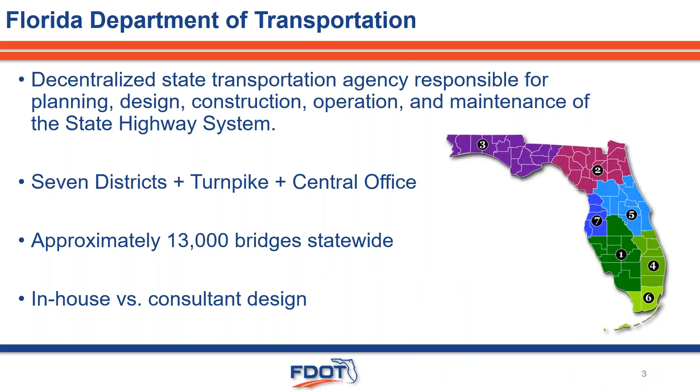We own and maintain approximately 13,000 bridges across the state, one of the largest bridge inventories in the United States. Infrastructure projects are delivered in the state of Florida through a combination of in-house staff design and consultant engineering firms, and FDOT provides specifications, standard oversight, and final approval on these projects.

Dr. Chung is based out of the Florida Department of Transportation State Materials Office, or the SMO. The SMO supports our central office by providing statewide leadership in materials engineering, testing, research management, and quality assurance. They work to develop material specifications, evaluate product performance, and establish testing acceptance criteria to support the Office of Design.

With that, I will turn it over to Dr. Oliver Chung. Thank you, everyone. Thank you, Natasha. This is Oliver. I'm a state corrosion engineer, and right now I've been in service for 2 years, so I'm still learning, and today I'm going to be learning with you.

Here's a little bit of outline. Everyone knows corrosion, and I always like to start with the 5W1H: who, where, when, why, how. All this will solve my problem, and that's the way I'm thinking. I also want to introduce a little bit of the framework of the State Material Office, especially my team, the Corrosion Research Lab, and based on the topic present in the future, how we execute the CP program in the past and moving to the future.

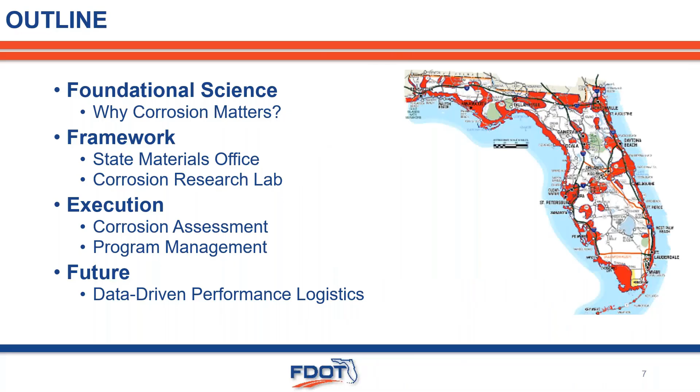Maybe the CP program is a good way to improve that. As I mentioned, future data-driven performance and logistics is what FDOT is moving forward with. So let's start with the 5W1H.

What is corrosion? I'm still learning, like everyone. In Florida, as Natasha said, we have almost 12,000 to 13,000 bridges considered in extremely corrosive environments, and bridge substructures are always commonly affected by corrosion-induced damage.

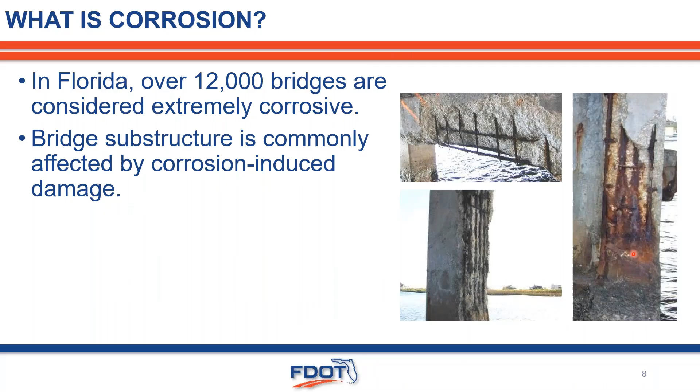We have a lot of water activity, all this in the splash and tidal zone. You can always see some corrosion issues. As you can see, we have something on the girder, something on the pier. All this reduces the service life of the bridge.

So why does corrosion matter? Here's an example - more information on the Fern Hollow Bridge is being presented in May. Everyone, I think all bridge engineers know this accident or incident. So it's about safety, service life reduction, structural integrity, and especially cost.

Right now to rehab one bridge costs a lot of money, and there's environmental impact. Based on the data, you can see our climate has been changing. Average temperature is starting to rise annually.

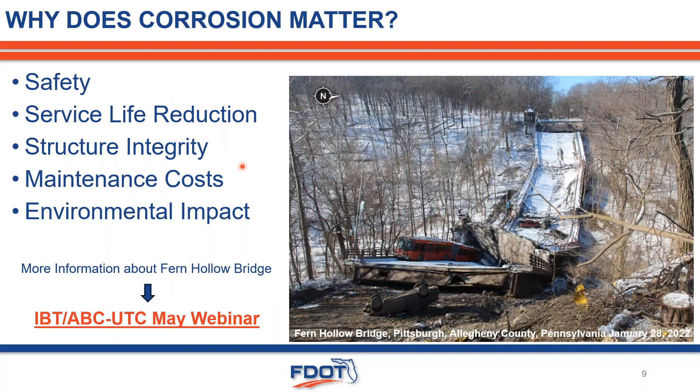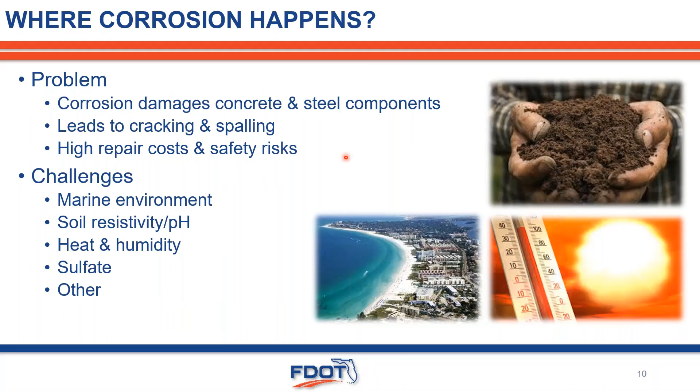Where does corrosion happen in Florida specifically? Usually for Florida we have marine environments, and in central Florida we have a lot of clay soil, all this resistivity and low pH, and also the hot weather, heat, humidity, sulfate, or others. So the problem is corrosion damages our infrastructure, leading to cracking and spalling, losing structural integrity, and that causes a lot of safety issues and higher repair cost.

So when corrosion happens, I'm showing the corrosion mechanism. As you can see, corrosion always comes from 4 major components: anode, the site where metal ions dissolve into the electrolyte and electrons are released, and cathode, the site where...

...electrons are consumed through a reduction reaction, often involving oxygen, and electrolyte, the conductive medium, the moisture that allows ions to move between the anode and cathode. And the metallic path, or connection, the physical connection that allows electrons to flow internally from the anode to the cathode. That's when rust happens with all these 4 components.

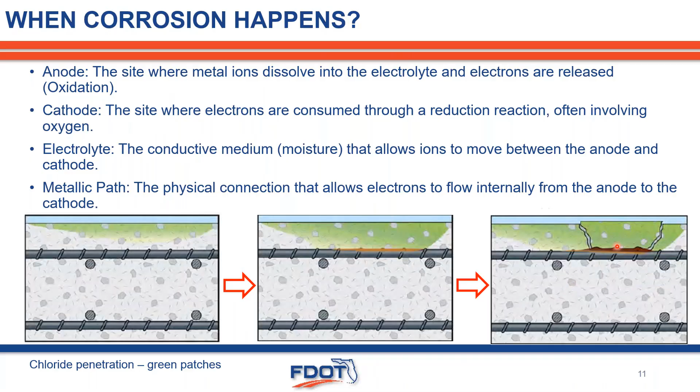Then concrete starts to fail. So who is affected by corrosion? I would say the public, everyone, all the users. Here's the specific number of bridges right now in Florida.

Based on 2025 data, about 3,400 bridges are over their design life. Maintenance and repair for the department is very heavy. So how we're going to extend the service life of the bridge is a key component, which relates to how to control your corrosion problem, one of it.

We do some estimates or predictions nowadays. Every year, for the next 5 years, we will have an additional 550 bridges bypass their design life. So as you can see, the need is there.

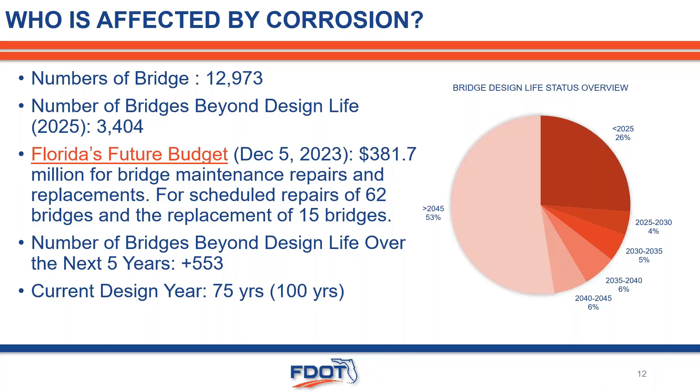Our current design bridge year is 75 years, but now the department has the intention to push to 100 years, because now we start to have a lot of new material, and also people realize the maintenance or rehab costs, especially restructuring, construction costs are increasing.

How do we stop corrosion? There are a lot of ways to do this, especially for Natasha's group - actually she's the expert on how to design infrastructure for corrosion. You can base it on the environment, on material design, or use chemical inhibitors to stop it, or corrosion resistant materials, for example coating systems, stainless material, GFRP, and also protective coatings.

Also structural design, obviously including the thickness design. So there's a lot of ways to prevent or mitigate corrosion. And the other specific topic is the CP system, which is our topic.

Now I'm going to jump into the State Material Office, a little bit of framework here. We focus on established policy and procedure for the Florida Department of Transportation Material Program, specific material. In our unit, we have structural material, which is mainly asphalt, geotech, and pavement.

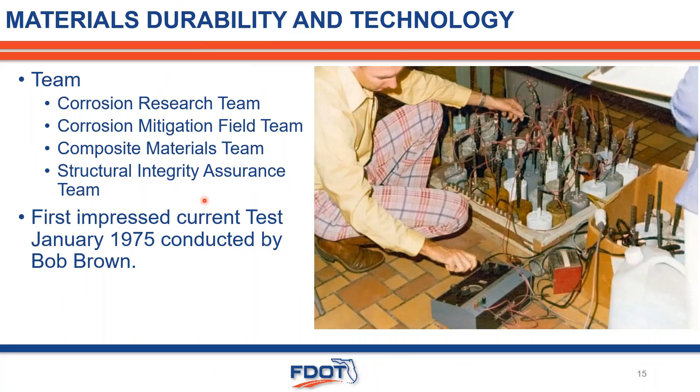Each team's function I mentioned briefly in the previous slide, but for the research lab, they focus on long-term research—any material can be used. Nowadays we hear a lot about mixtures, like type S, or corrosion parameters, how we define environmental classification—that's also based on our research and work with Natasha's team. If you want to know more, you can go to our standard structure design guideline.

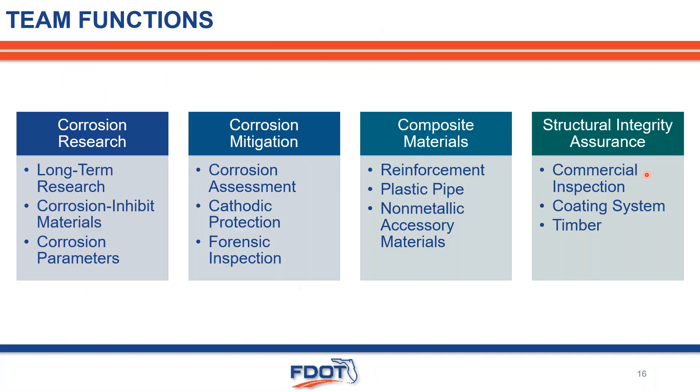For the corrosion mitigation CP system, we conduct the corrosion assessment, because before you design the system you have to understand it—install the CP system or do forensic inspection. Composite materials, like I mentioned, aren't today's topic, so I'll skip plastic pipe, GFRP, all that stuff. For structural integrity assurance: commercial inspection, coating systems, and timber.

Specific to the field team, highly related to CP, my team's function mainly provides six services. First, corrosion evaluation, NDE, and coring. Second is designing a proper corrosion prevention system—different types of CP systems I'll introduce in the following slides. The services also include installing the CP system sometimes, but our majority focus is on how to assist the contractor in doing that.

For maintenance, calibration, and repair, we work with our contractors. We also provide independent assurance to make sure the CP system is working and its function is not compromised. And we are also looking for new research and new implementation—new technology is not going to stop. So that's the other function we have.

The first function is corrosion assessment. Usually when my team goes out, the first thing we need to understand is the history. I always like to learn from history—you have to understand when the bridge was designed, what construction methods were used, or the maintenance record and other history about the bridge. Sometimes I treat us like a doctor for the bridge, working with the structure team and the maintenance team.

The second part is the environment. Where is this bridge located? Is it between a river or the sea, or near a key or island? What's the class of the environment, and what's the weather like? For Florida, we don't have a freeze-thaw issue, we don't have a snow problem—we just focus on hot weather conditions.

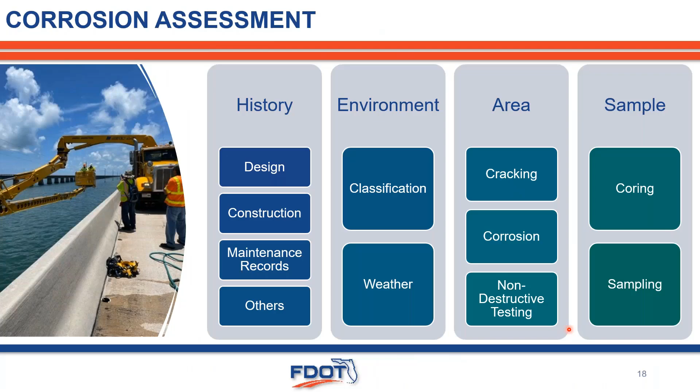And area—where is the corrosion area? Is it on the girder, on the pier, is there cracking, what caused this to happen? Sometimes we know corrosion could be from poor construction quality, so NDT sometimes helps us check all this. And sampling—as an engineer, trust and verify. Once you have all this puzzle together, you probably want to verify by coring and sampling what the real condition of the current material or bridge structure is.

So, going to the NDT test—I'll show you on the next slide—but most of what my team does is electrical resistance and surface resistivity testing, to understand the current concrete permeability, because permeability is also a key component affecting the corrosion rate and corrosion potential. We check whether this structure currently has any active corrosion happening.

GPR and ultrasonic testing are sometimes used to ensure the design thickness and spacing, and to check for any construction quality concerns, anomalies, moisture, or leaking problems. That's what we're currently mainly using for NDE, and the equipment for corrosion assessment.

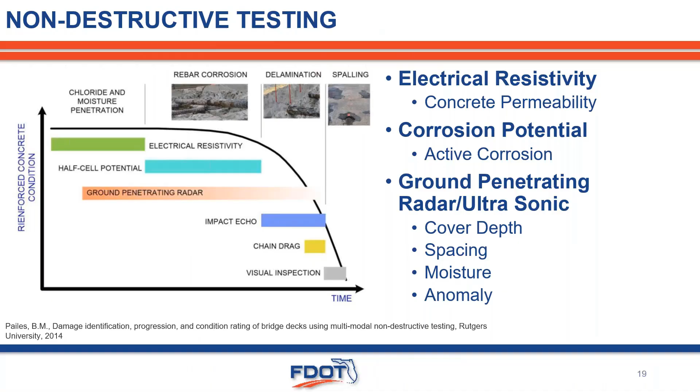I just want to mention that the 2026 World Bridge Engineering Conference will be held at the Hyatt Regency—that's a good hotel, I do like it. But before that, an NDT workshop will be held for the whole day, so I just want to highlight that and encourage everyone to join.

So I'm just showing you surface resistivity, GPR, ultrasonic—all this equipment we have been actively using in my program.

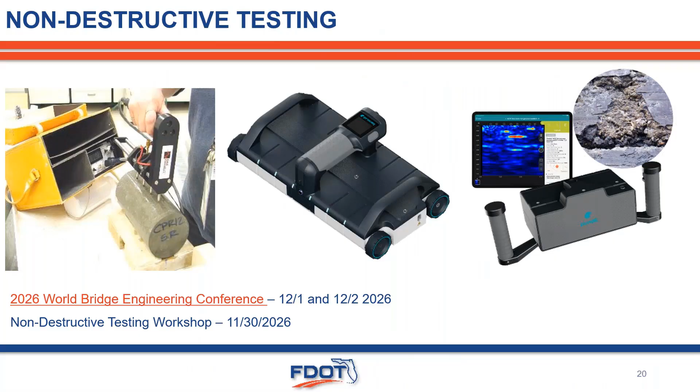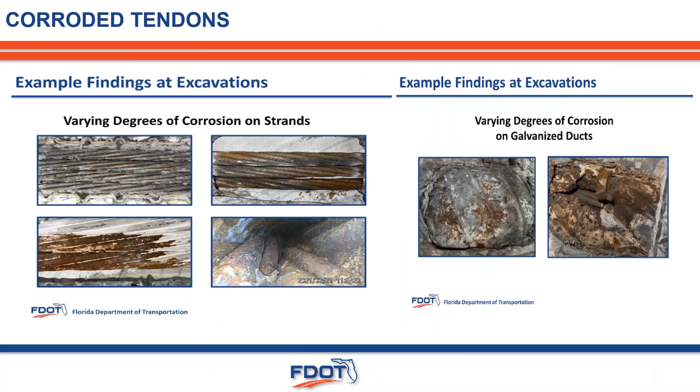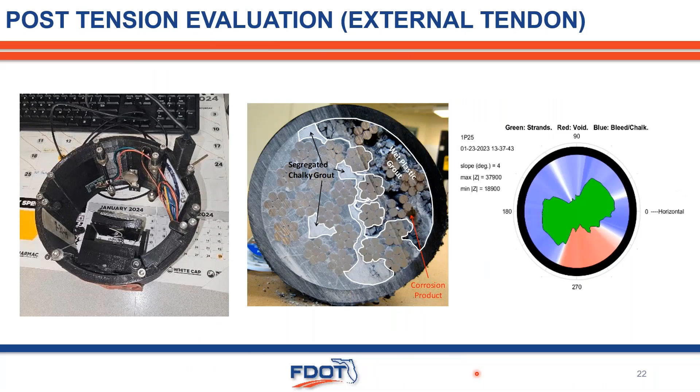That's another NDT testing for the post-tension evaluation. We only focus on the external tendon. This is from our research project. We have this magnetic equipment, so we can detect where the corrosion is in the tendon system visually. We're still working on this research, and hopefully we can adopt this technology as soon as possible. Maybe there's some strategy we can use to overcome the corroded tendon problem.

As everyone knows, based on the research, FHWA already concluded that the CP system is very powerful and good technology that has been proved to stop corrosion for the bridge deck or any structure. I just don't like to say stop - I'd probably say mitigate, because really you pretty much just slow down the corrosion.

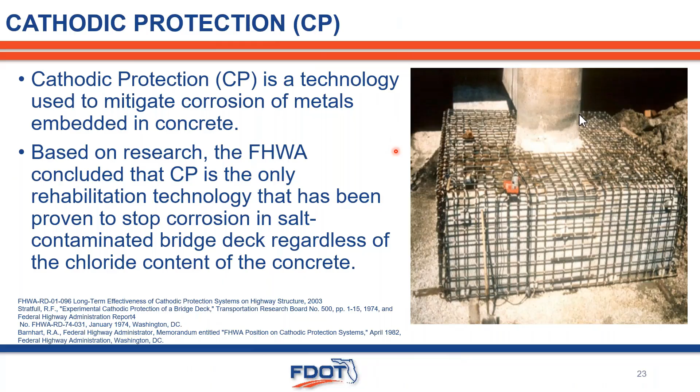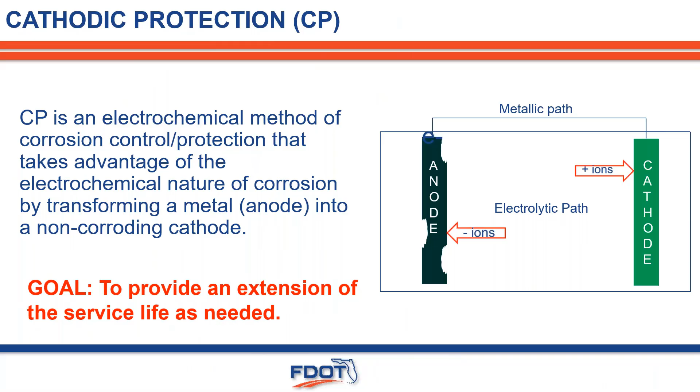The CP system is an electrochemical method of corrosion control protection that takes advantage of the electrochemical nature of corrosion by transforming the anode into a non-corroding cathode. Sometimes I treat the CP system like a cell battery. The idea is to change the cathode to anode to prevent transferring corrosion from the key component to the anode. So here's the macro cell - on the structure, you can see where the cathode is and where the anode happens in the field.

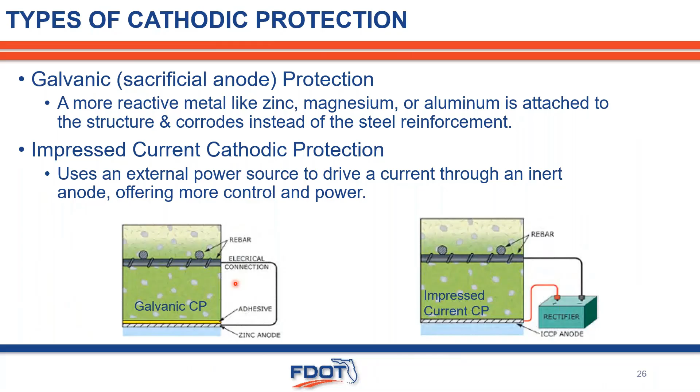So for types of CP systems, right now we mainly have two types. Galvanic, also called sacrificial anode protection - a more reactive metal like zinc, magnesium, or aluminum is attached to the structure, and corrodes instead of the steel reinforcement. Pretty much you transfer the corrosion to the other metal. Impressed current system uses an external power source to drive a current through an inert anode, offering more control and power. Those are the two major systems at this moment.

I know the CP system is usually used by pipe or oil companies. They use it a lot, but with our 30 years of experience, this is the type of system or anode we are currently using in FDOT infrastructure. We are still trying, still tracking each system's performance, because as I mentioned before, corrosion won't happen in 28 days, corrosion won't happen in the next hour. So we need to keep tracking this performance to find which one is the best use for different infrastructure.

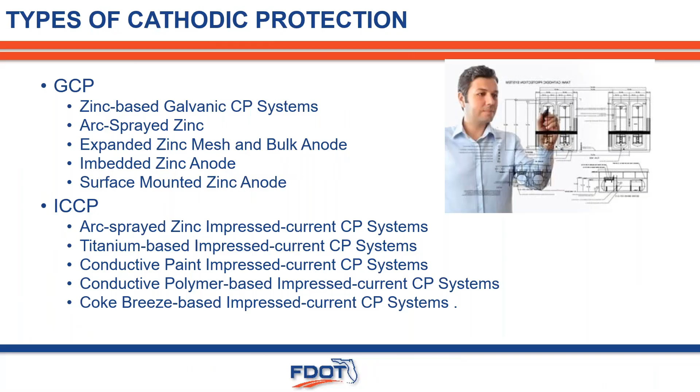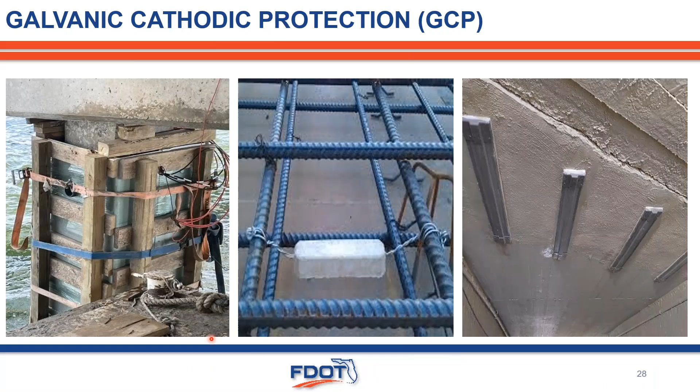This is just a general galvanic CP system we are using in the department. As you can see, some point anode systems, attached anode systems, and obviously we use a lot of jackets on pier corrosion. And this one is an impressed current system - usually we connect to an independent power source and provide enough current to prevent the corrosion from continuing to happen.

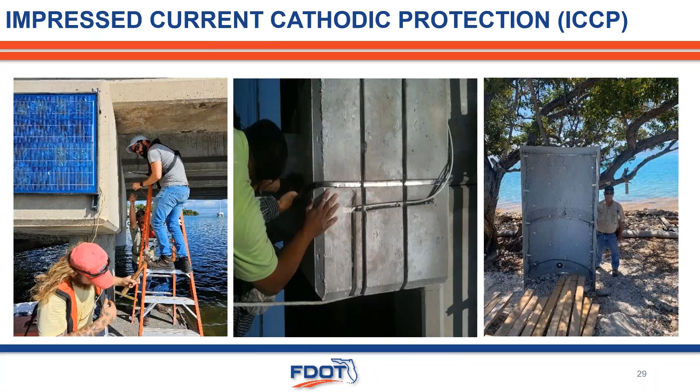And here is the research - we are trying to use solar panels. I will introduce this later. Just a little summary between the galvanic and the impressed current systems.

Usually with galvanic, you don't really need to do any inspection because you're just waiting for the active metal to be consumed, and based on our experience that's roughly less than 20 years. But every 2 years we do a visual inspection to check corrosion development and whether the system is still functional, and sometimes we have to do some repair. The cost is relatively low - I want to highlight, average about $2,000. That's just based on the jacket. People sometimes use it for different functions, but I just want to give you a general idea based on our data system - probably about 2,000 to 2,500 per jacket.

Impressed current systems, because you have to control the current and the power comes from independent solar sources - there's research showing that if we don't maintain the right current, sometimes you actually speed up the corrosion. We are trying to adopt a remote monitoring system or even remote control, however there's a concern from our security or IT group, and we are working to resolve it. Right now, 2 to 6 months is our inspection frequency, because we also want to check the current and check functionality. Inspection includes visual inspection, corrosion development, system function, and because this comes with power, routine adjustment is needed.

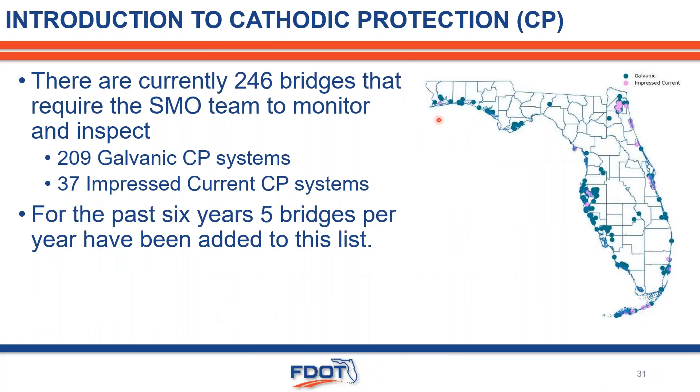It's interesting to see this, right? The CP system you're putting in the bridge is all on the sea coast, and that reflects that under the marine environment, corrosion is a problem and a concern.

How do we manage this, program-manager-wise? In the past, because we were in the R&D phase, and corrosion won't happen in the near future, it usually takes 30 years, so in the past we didn't really centralize all these projects and programs.

Since the technology improved and AI and database systems are now available, my leadership and myself decided to centralize this program because we learn from the mistakes, we learn from the history. What can centralizing change? We can ensure effective corrosion protection.

Like I mentioned before, right design and right strategy for corrosion is a key component. So with centralization, you can start to monitor what kind of system you adopt for corrosion, what size, what material is in it, and find the best or optimized way to address the infrastructure corrosion issue.

Also, with data-driven methods and routine inspection and remote monitoring, we can be proactive and prevent system failure early. At the program level, with centralization, we don't just get the project done and move on. That helps us be more proactive about maintenance on the CP system or bridge.

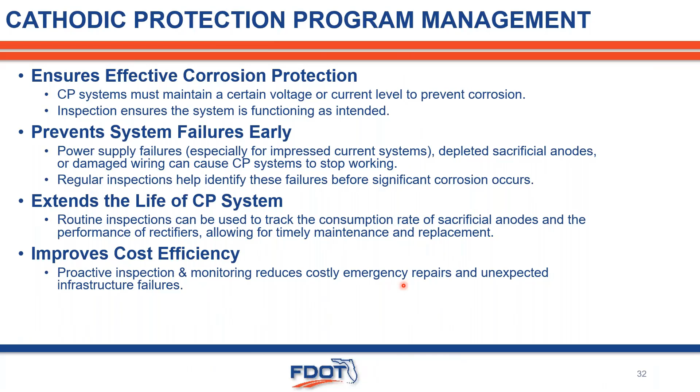And ultimately, with all this optimization, we can further improve cost efficiency. Like I mentioned, one pier costs 2,000, another costs 3,500. How many piers do you have in your bridge? That's a lot of money.

If it's non-functional, meaning we need a repair or a new CP system, maybe there's new corrosion happening, we start to work with the district maintenance office to develop the project. It depends on the issue—it could be as simple as replacement of the anode, or adding a new CP system. So the district maintenance office will initiate the project.

SMO, as a technical expert, will review the design and provide input. State Material Office, when the project initiates, will provide engineering support or quality assurance to ensure the CP system functions—because I've seen that even a CP system, if not installed properly, will corrode. There's a wire, there's metal, it's the same thing.

We finish the project, then it comes into the flow, and we start maintaining the CP project itself. Like I mentioned before, not just FDOT—most active DOTs like TxDOT, NY State DOT, Caltrans, most of the CP system remains on special provision, which is just project based.

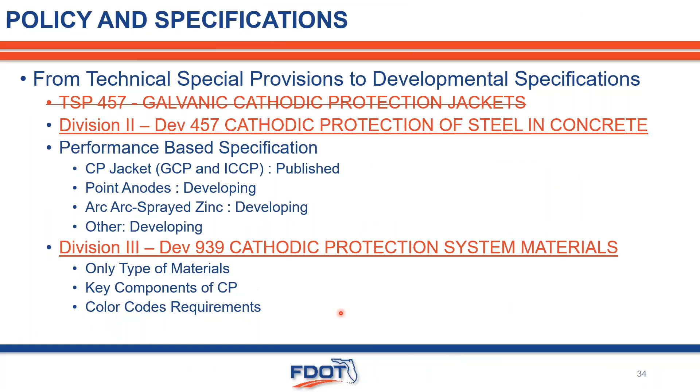Right now we only have a CP jacket, and we're developing the point anode, arc-sprayed zinc, or other CP systems for upcoming developmental spec updates. Division 3 in the FDOT system is the material requirement, so you can find all the material requirements in 939. And as a department agency, the color code is required—you'll find more information in the specification.

And now we're talking about the future.

Like I mentioned, we have been working on monitoring. Right now, we probably have only 2 or 3 best practices for doing the monitoring, but that's the future: prevent system failure early, be proactive, optimize the inspection frequency, extend the life of the CP system. With current technology this can be done, just like a smart thermometer in my house. Right now everything can be monitored.

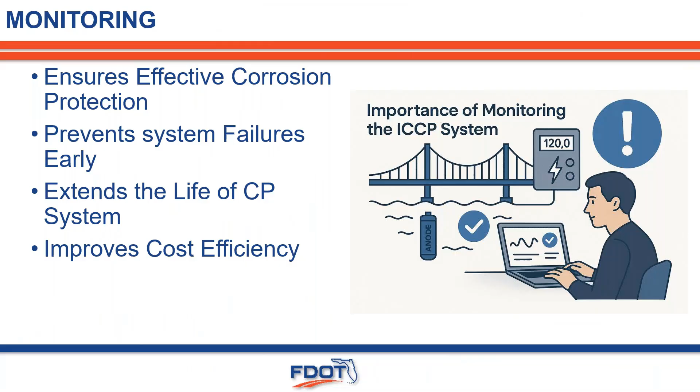And this is the current strategy, moving forward with data-driven performance logistics. We want to use the database, standardize the data for the different systems. You can see the voltage change or parameter change during the daily cycle, and ultimately we want to use this data to predict the corrosion risk or even adopt it into the bridge management system. We are also considering AI implementation, how we're going to use AI in the CP system.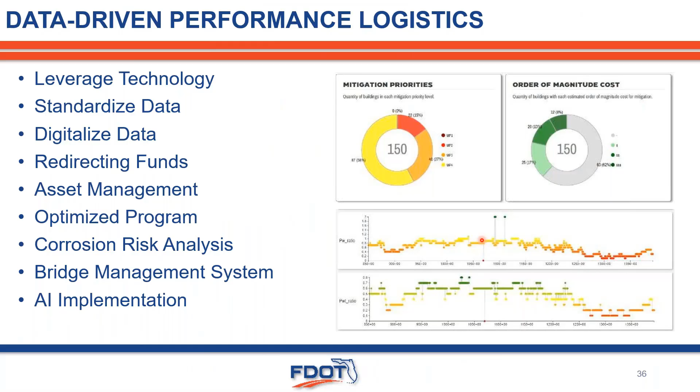This is, I would say, a successful research implementation. In the past, impressed current highly relied on an independent power system, but sometimes in rural areas, or on a bridge or certain structural elements, you don't have power available, so you have to find power to run the impressed current system. But now we are starting to adopt solar panels and batteries that can help with the retrofit of the CP system for some specific areas. Right now we have adopted this in the Skyway Bridge, and I'm going to introduce that in the next slides.

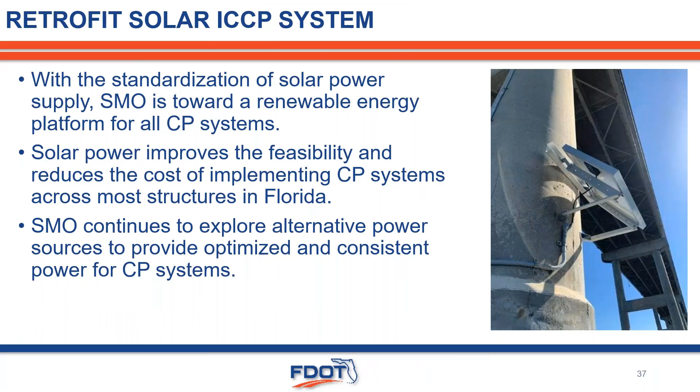So here's the best practice of the Skyway Bridge. I think right now the CP system in the Skyway Bridge, based on my understanding, is the most advanced in Florida right now. We have a remote monitoring system, we have a solar panel, and all the corrosion right now is being properly controlled. So this is the project, Skyway Bridge.

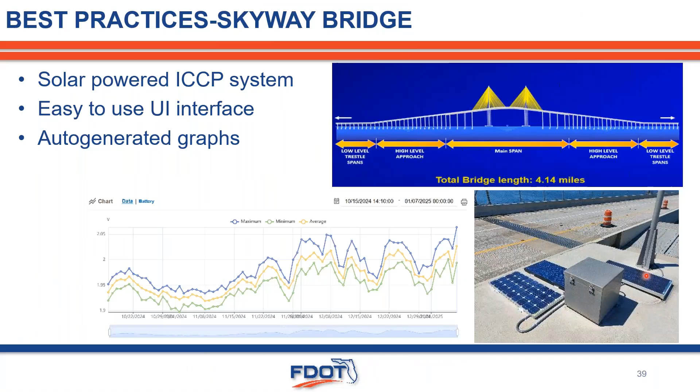We have a total bridge length about 4.14 miles, and we start to see a lot of corrosion happening nowadays. You can see we started tracking our daily impressed current data, and as you can see, our environment is dynamic, so certain adjustments are needed. Here we show the solar panel system, so we can retrofit even inside the segmental bridge.

Another practice is arc spray, also called metallizing. Nowadays, probably last year, we found that when we apply the metallizing, if the two arc spray spots are too close, there's a halo effect -- corrosion starts to happen in between -- and that's also a consideration we are thinking about. Should we keep using this technology in our developmental spec or not, or what kind of requirement should we add? Mention again, corrosion is not going to happen in 28 days or one day.

This needs to be long-term monitoring. So what I can do -- because ultimately with metallizing or arc spray, you will need to find a place to use it -- probably right now we are considering whether we are going to use the metallizing, arc spray, or require the entire girder to be metallized or have this technology applied.

Like I mentioned, uneven metallizing leads to corrosion differential. That's what we found -- aging, exposure, degraded performance, high risk in a salt-laden environment like the Florida Keys, all leading to this halo effect corrosion problem. We are doing some research right now, and we will make a decision for the future on how we're going to approach metallizing.

And the other future direction is we are thinking about the hybrid CP system. A galvanic system lasts about 20 years, and I know right now in structural design we are moving to performance-based design, so same with CP. We would like to adopt the current condition CP system and improve it to save cost.

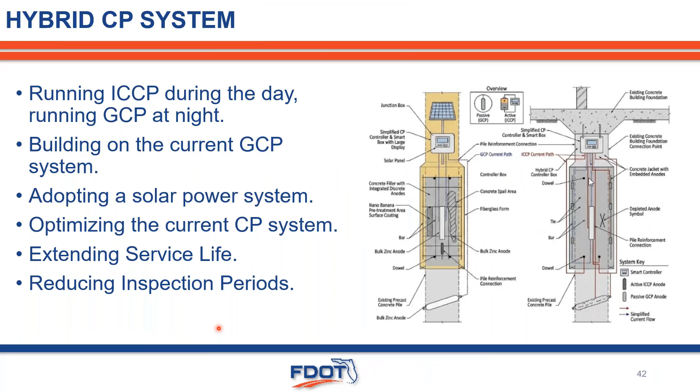Further, current challenges for the CP program, obviously hurricanes -- because all this CP system is just attached to the bridge. Yes, we do have RC bridges, they can survive during the hurricane, but for my wire, for my control box, sometimes we cannot. And we do have accidents -- sometimes boats hit the pier, and that's the reason why routine inspection is needed.

And also we have the human factor -- I always like to call it human factor. Some random people will just be curious, maybe they want to do their own research, so our system sometimes gets damaged by the human factor. And also it's very interesting -- I mentioned that even the CP system, this anti-corrosion system itself, gets corroded.

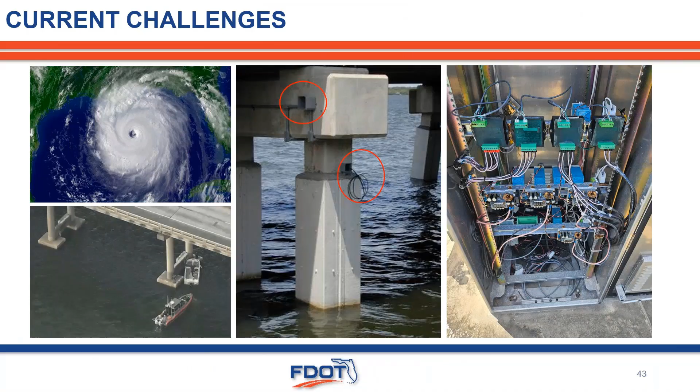How are we going to choose the proper material or the right strategy for the CP system is also key. The program side is starting to collect data and standardize the different CP systems. I was hoping this could address these challenges in Florida DOT. My vision for the future is to have a CP management system. We do have a PMS system and a bridge management system, and a CP system, I think, is needed in the future. That will help decide what's the best strategy for the department for the bridge. That's my slides. Welcome, and I think right now it's question time.

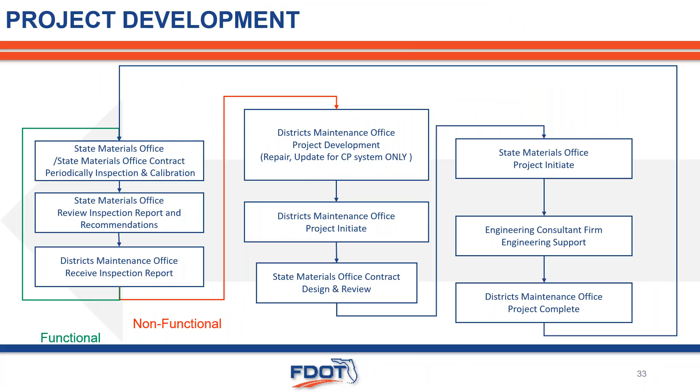You mentioned hurricanes. Do you ever have any problems with lightning? I know Florida is one of the lightning capitals of the world, so I was just curious.

Does Florida DOT require the use of cathodic protection on any new bridges? No. I'm personally against it, but I can also understand it from the structural design point of view. If you need to drop or reduce the material or the design, that could be an option, or trying to be more proactive.

We actually have one research project where we wanted to try a new material or new mix design. During the construction phase, we already had a corrosion issue, so unfortunately we had to put in the CP system during new construction. But again, my concept is to never put CP into new construction. You should know the history, know the design, have your strategy right there, how to stop the corrosion and how to do the optimized design.

On slide 30, you had the cost for each. The question was, is that the cost for each inspection or per installation at each location? Per installation, just a new jacket in one pier.

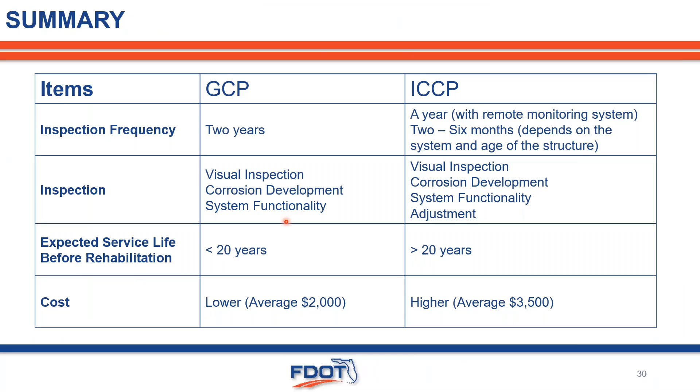Have you used bulk anodes, zinc or aluminum, for reinforced concrete piles underwater? Yes. Do you have guidelines or specs for the use of bulk anodes? That's all in the developmental spec, and since it's a developmental spec, there may be some gaps. I'm always very open to any comment or input. Once you review it, if you have any question or suggestion, my email is here, so you can always contact me and we can have an organic conversation.

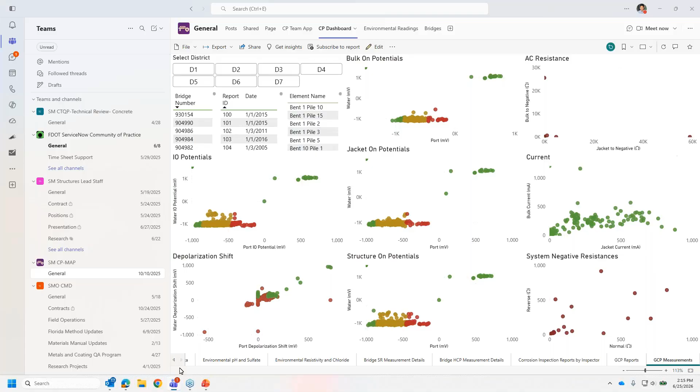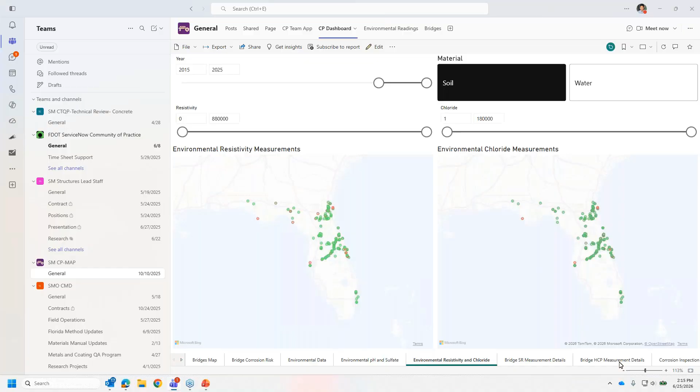So we're trying to have all the data we have, even our bridge map to control all this, and we're also including our corrosion map, environmental data, so we can pick and choose to understand the situation. All this has been working on. So far it's good, and more is to come.

The engineering data is really nuanced and can be complicated, especially since we have a lot of data collected. How do you find it best to explain to lay people, whether through news or having public available information? What are your thoughts on explaining the successes and troubles that we have with corrosion to the general public?

I'm trying to leverage that system in the future. Definitely, visualize is the key. So I was hoping that system can be more mature right now. Even I only have a galvanic CP system there right now, I don't have an impressed current system.

But like I say, I'm trying to build the profile for each bridge. Right now in my system, every time my team or the contractor goes out, we have the inspection report or maintenance report there. So my goal is in the future to share with the public. The public have some concern about that bridge - they just need one click to pull out all the profile, including the corrosion issue.

Okay, great. So for those who have really nice technical questions, please contact Oliver, he has his contact information with you. But Oliver, there are a lot of questions on this slide you have right now with that metallized bridge girder. So the general question overall is, how do you know - did the metallizing have any effect to accelerate the corrosion in between the metallized portions, or do you think that corrosion was just caused by time, essentially?

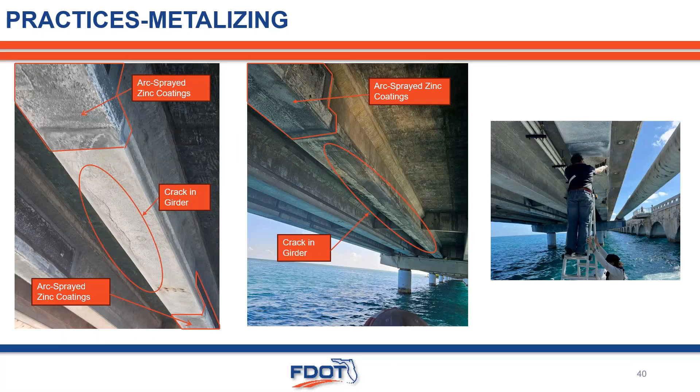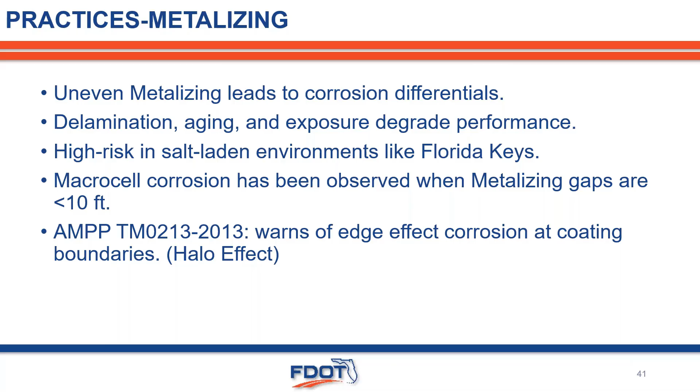My program manager, Shannon Dees, has been keeping updated on this with me. And this presentation here, this is our assumption based on the research we have - this idea, but further information is needed, further tracking is needed, and maybe research might need to be done at a small scale. So we are working on addressing this concern.

One quick question to throw in - what is the future in Florida for alternative corrosion resistant materials?

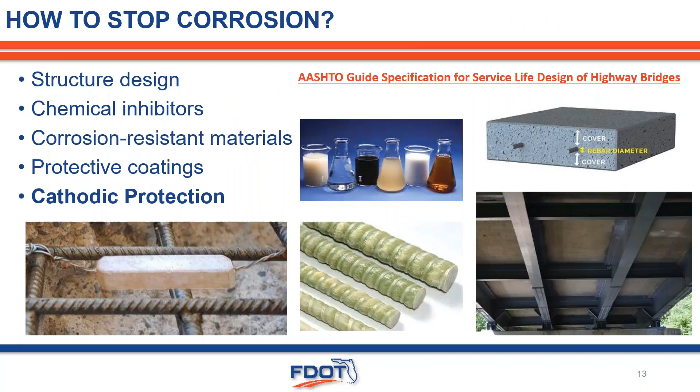We definitely will work with Natasia's group. Like I mentioned, be more proactive on the design phase. Even right now, we do see some more projects start using corrosion resistant mixtures, and GFRP definitely is the future, and that's definitely the way to go. I can see more and more use of GFRP, even for the coating. We have a lot of new coating systems right now. So I just think more corrosion protection will be put in during the design or new construction phase.

The best way is you don't need a CP system, so I just don't need to work at all. That's an ideal world, but if you are using corrosion resistant material or chemical inhibitor, that definitely can reduce my workload and reduce the cost of maintenance. And that's definitely the future.